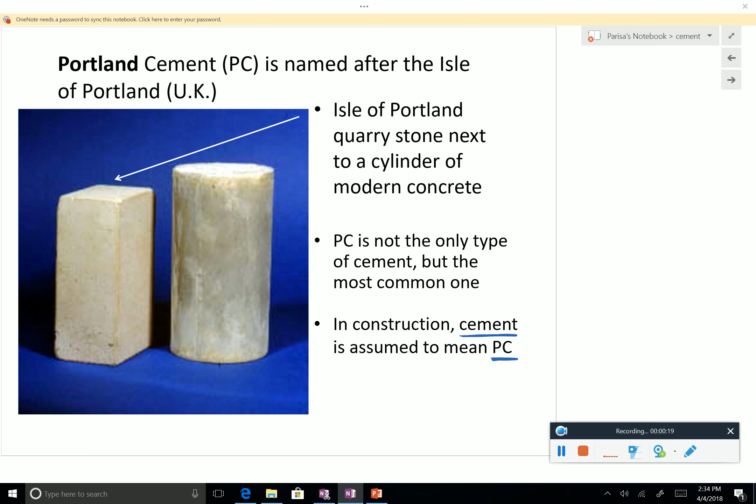When we talk about PC, it's not personal computer, it's actually Portland cement in the context of civil engineering or architectural engineering materials. And whenever you say just cement, people normally mean Portland cement. This is not the only type of cement available. It's worth knowing.

So, people typically use the terms cement, mortar, and concrete interchangeably. But as engineers, you need to be careful. These are different things. So cement paste is cement and water. And cement paste is, you can think about it as the glue, which glues the aggregates together to make concrete. So that's what it is. Cement by itself doesn't have any gluing effect. You need to mix it up with water.

What is mortar? Someone knows? Cement, water, and sand. Exactly.

It's important. I hope you remember that mortar is not the same as cement. So you hear people saying, "Oh, I cemented my driveway." No, you didn't cement your driveway. This is wrong to say.

So as your colleagues from Pittsburgh or around were saying, yes, I remember. Just kidding. It's okay. It's good to laugh in the afternoon. I like energy more than if you don't have any energy, like some days where whatever I do, there is no energy. Anyway, this is better.

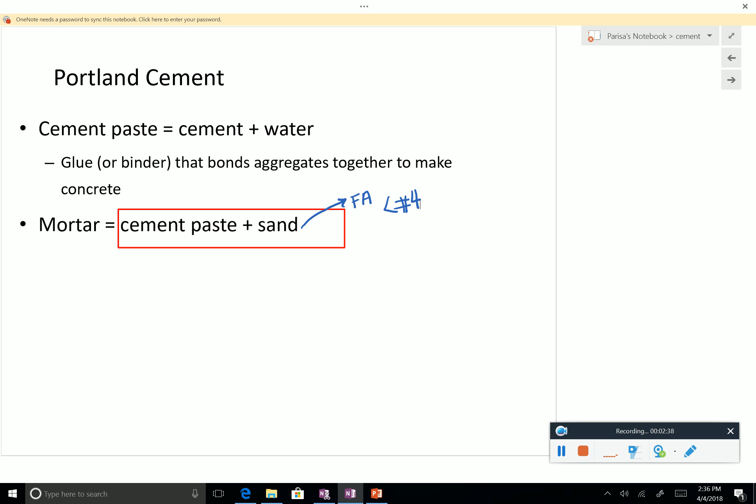Cement, water, and sand. And sand, when we talk about sand, we don't necessarily mean sand in the sense of soil mechanics. It's more like fine aggregates, whatever passes through sieve number 4. And concrete. So what is the difference between mortar and concrete then? Yes? Concrete has stone as well. Exactly. So we call them not stone, well, maybe here, but it's coarse aggregates.

So as you can see, the aggregates, fine aggregates and coarse aggregates, make up a major part of the volume of concrete. And cement is much less. And then you have some water, and of course you are going to end up with some air voids. And you see that you also sometimes have to add admixtures to get some exotic properties. Almost all modern concrete mixtures have some admixtures.

So this is pretty much what concrete is, and we are going to focus today and on Friday on cement before moving to the design of concrete mixes.

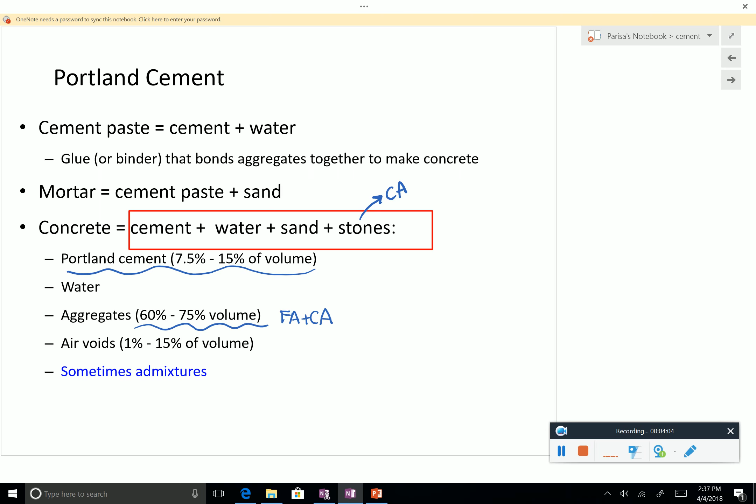So I want to show you a short video. This time I chose a very short video to show you how cement production is. Please pay attention to remember the main steps. It's very simple.

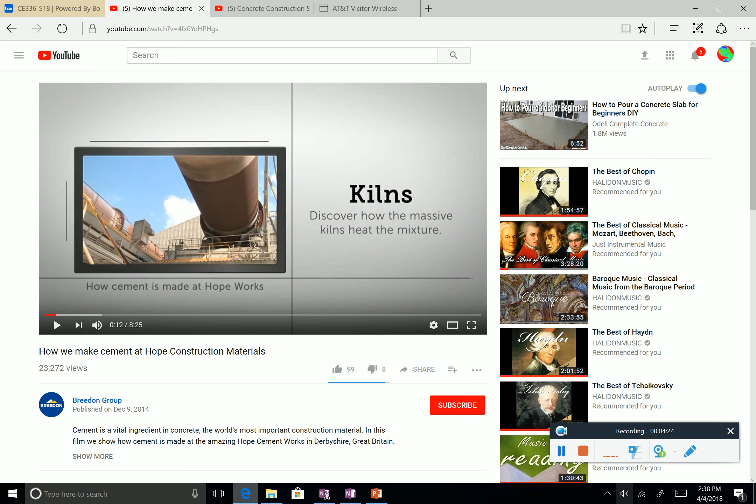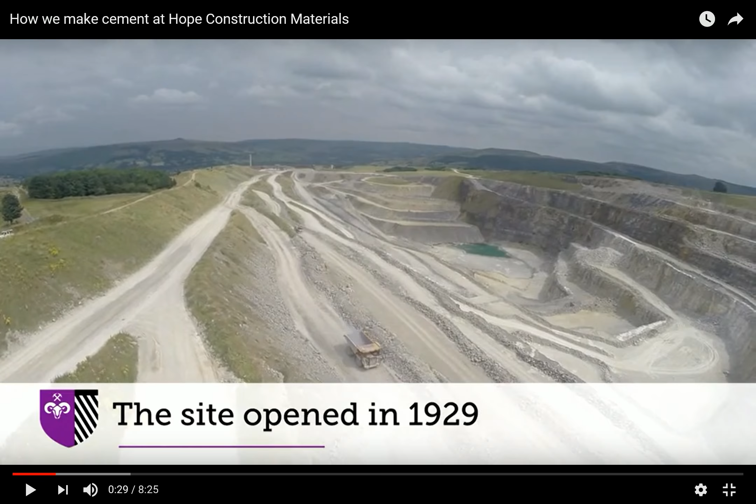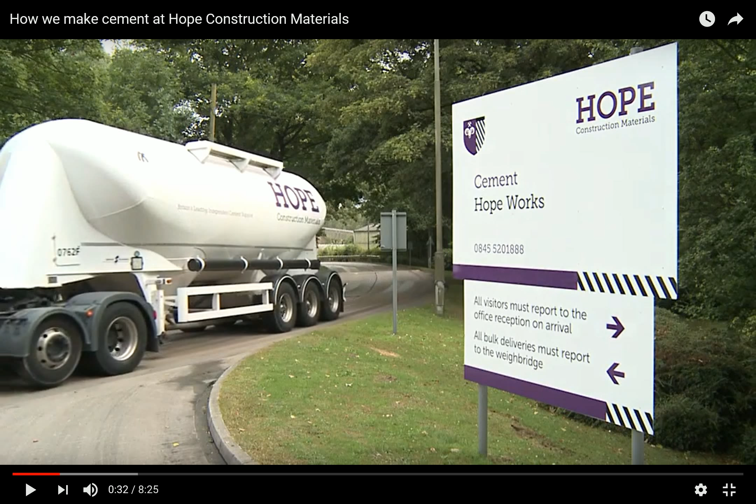It worked in the morning. Wow. Okay, wait. That was interesting. Why is it that way? So this was perfectly fine this morning. I may narrate it myself if it doesn't work. So let's see. Let's try again, change the cables. Okay. Okay, please keep quiet so everyone can listen.

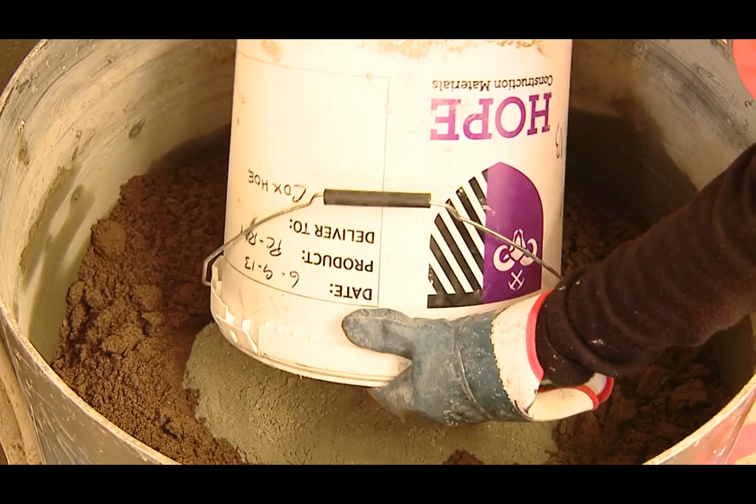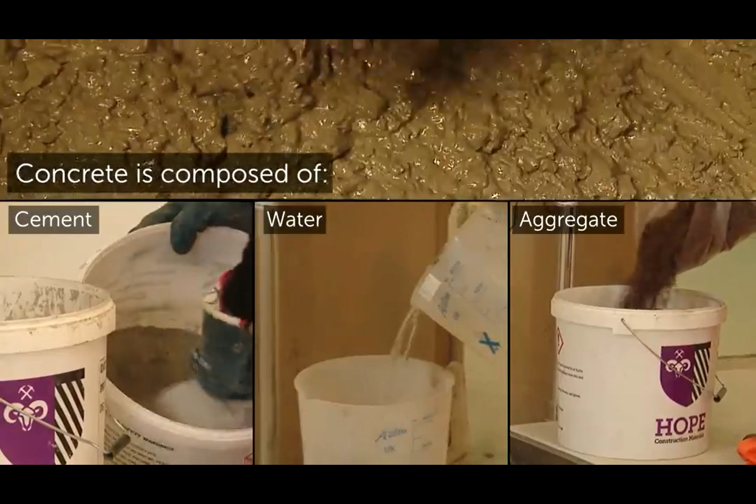Million tons of cement is produced here at Hope Works every year. The site employs around 180 people and has a strong safety record. It also prides itself on being a good neighbour and has long-standing links with the local communities in the surrounding Peak District National Park. Cement is a versatile construction material. It is the essential ingredient in concrete, the world's second most consumed material after water. Concrete is made up of cement, water and aggregates, rock, stone or gravel.

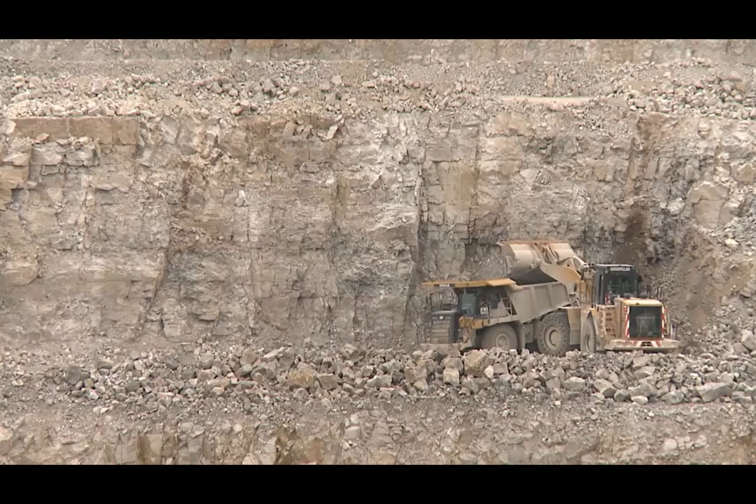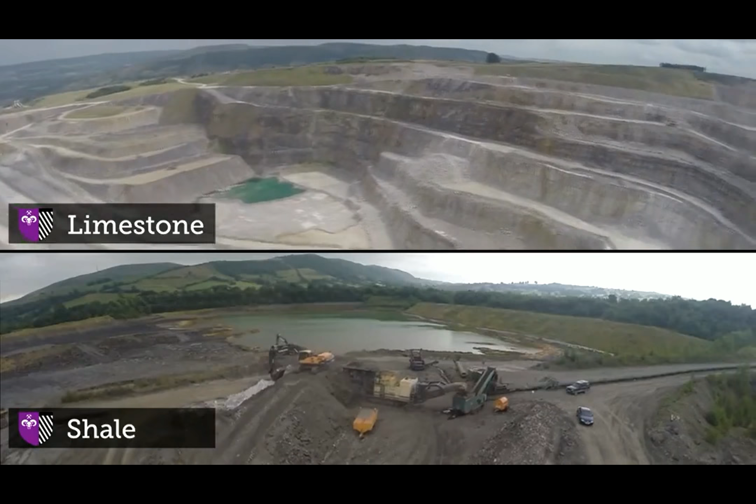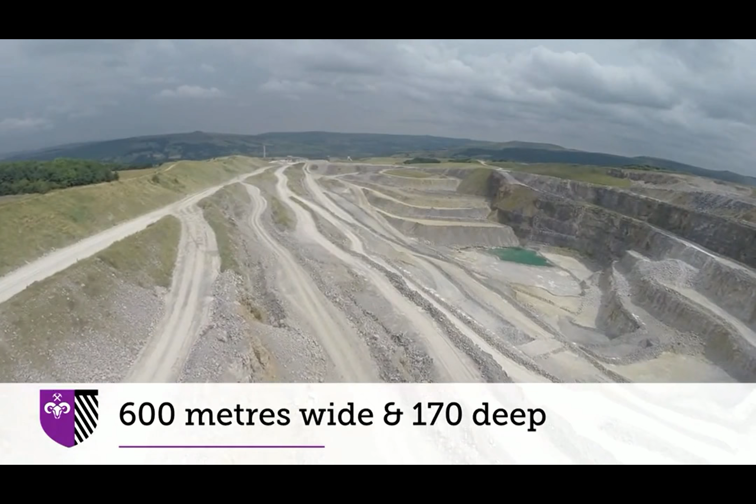Hope is renowned for its consistently high quality, including light coloration and strong performance. But how is it made? The process to manufacture cement is complex. It relies on ensuring all the right ingredients are combined at the right temperature. Just like baking a cake, the chemistry has to be just right. And the process starts here in our two quarries. Limestone and shale are the key ingredients for the cement mixture. This is the limestone quarry, which is 1.5 kilometres long, 600 metres wide, and 170 metres deep. At any one time, there are around 30 working faces, measuring approximately 4.5 miles in total length.

This rock here was formed 330 million years ago. Now 2 million tonnes of stone is extracted here every year. Shale is the other key ingredient, removed from our other quarry by heavy machinery, through a mobile crusher, and into the stone store. We also use pulverised fly ash, or PFA, as a part replacement for shale. The chemical composition of PFA, a byproduct from coal-fired power stations, is very similar to shale. As the quarry progresses, the worked-out areas are gradually restored, giving them back to the natural landscape as part of the conditions of Hope's planning permission.

Over 13,000 trees have been planted since 2003, and the company works with nature organisations to ensure the restored land encourages a wide range of wildlife for the future. Falcons, rabbits, stoats, ravens and hare are among the animals found in the quarry. To access the rock, controlled explosions take place around 100 times each year.

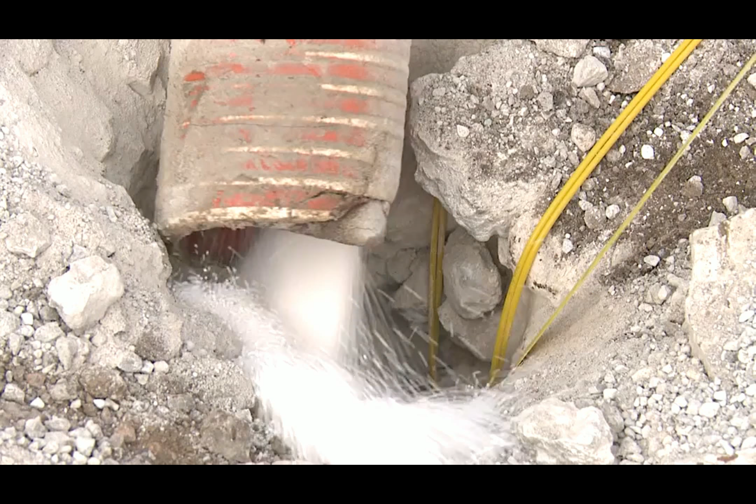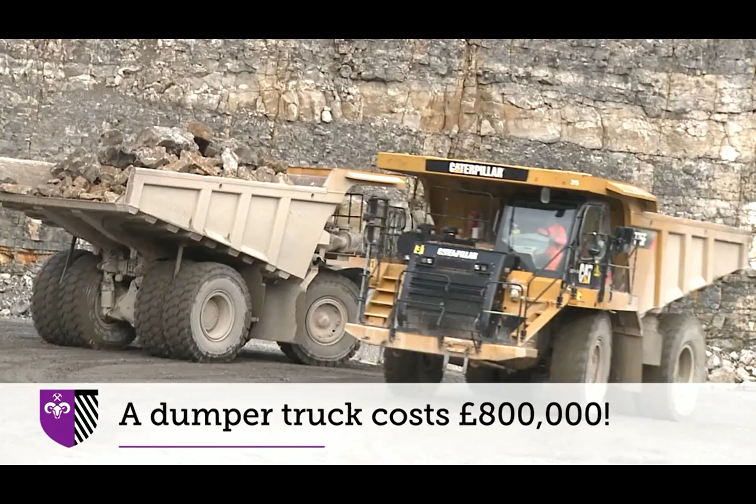Each of these blasts produces around 20,000 tonnes of material for Hope to use in the process. Skilled operators move the stone from the blasted areas so that the rock can be crushed. Some of these giant dumpers and diggers cost around £800,000 to buy. A new tyre can cost up to £16,000.

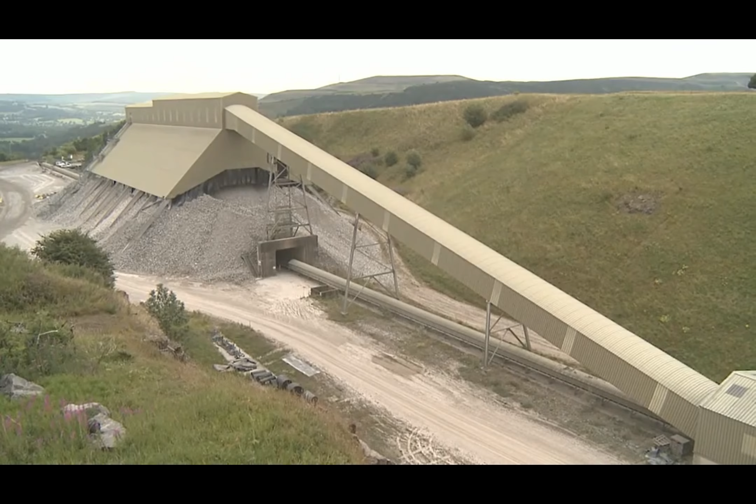The rock is crushed 3 times, from 1 metre down to stones smaller than 20 millimetres in diameter. The primary crusher can get through 1,400 tonnes of rock every hour. The second and third crushers process around 1,000 tonnes per hour. The stone is transported via conveyors to the works, where it's held in the stone store.

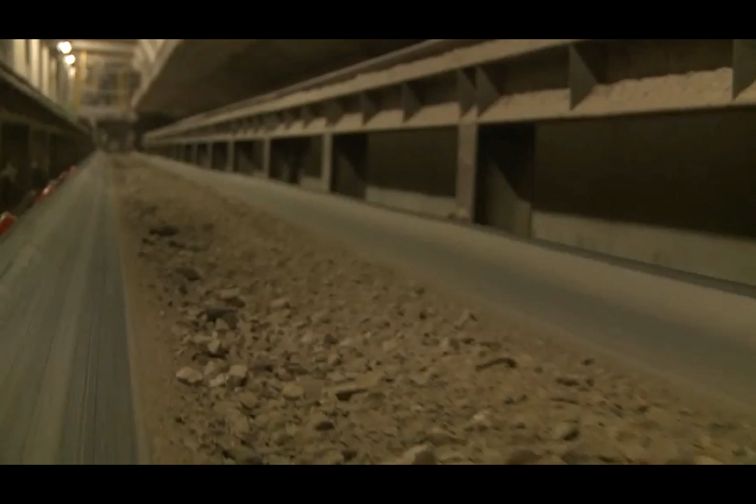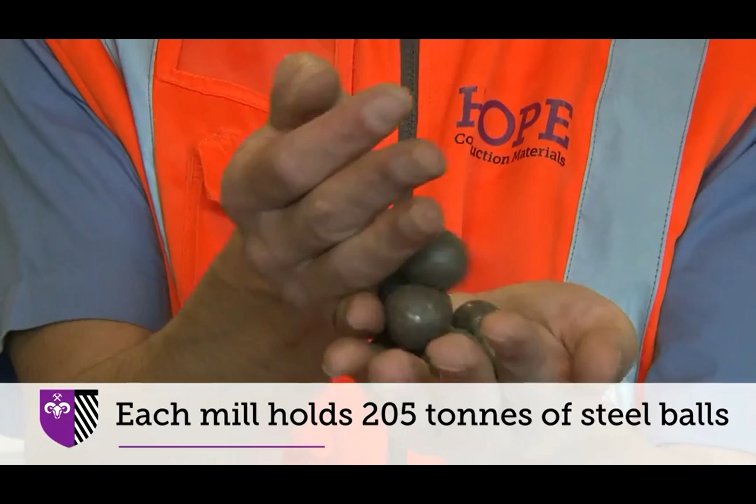Now we move to the works itself, where the quarried stone from the limestone and shale quarries and other materials are put through a chemical process to produce the ultimate product, cement. The stone from the quarries is transported to mills to be ground into a fine powder. In a tunnel beneath the stone store, limestone and shale are mixed together and moved on conveyors to the mills. Each of these mills holds 205 tonnes of steel balls, which grind the rocks to the required powder size.

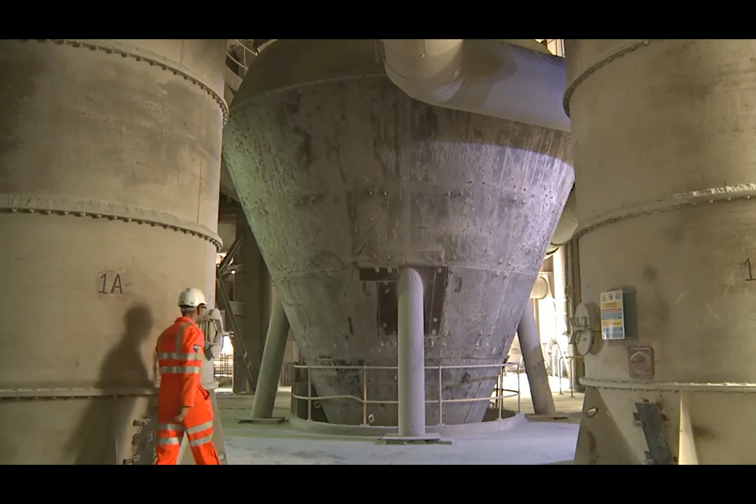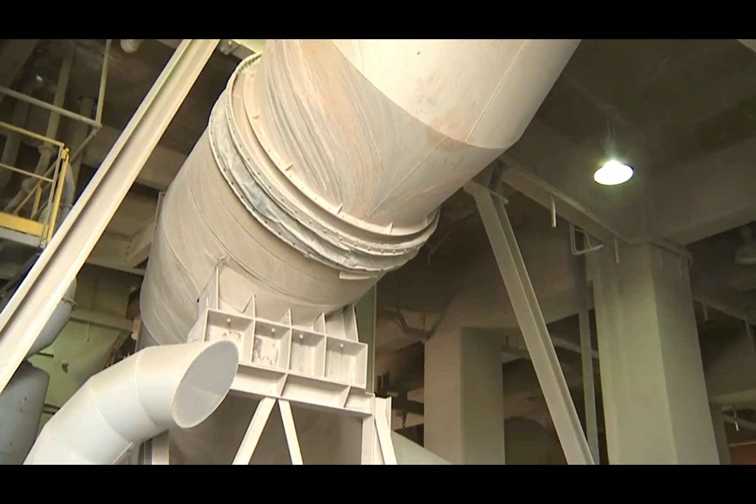The raw material powder, or raw meal, is then transferred to a blending silo before being blown to the 6th floor of the building, the preheater tower. You can see the cyclone tube structures inside the tower. As the raw meal moves from the top cyclone to the bottom, it heats up from 80 to 830 degrees in just a few seconds, preparing it before it goes into the next and most important stage of the process, the cement kilns. The kilns are the heart of the manufacturing process.

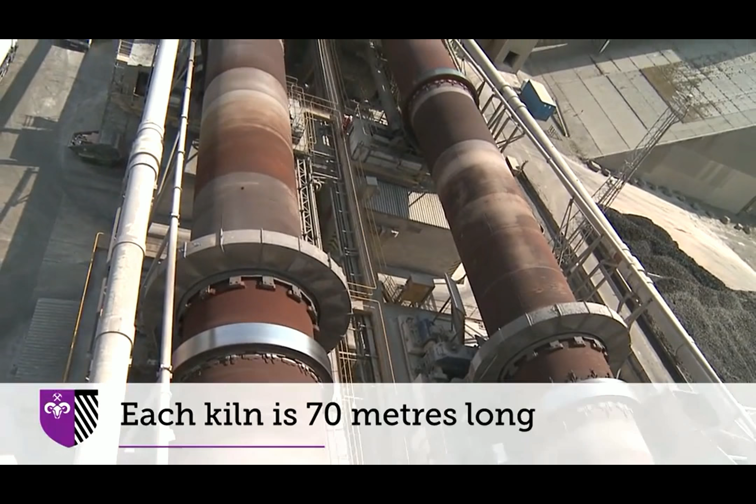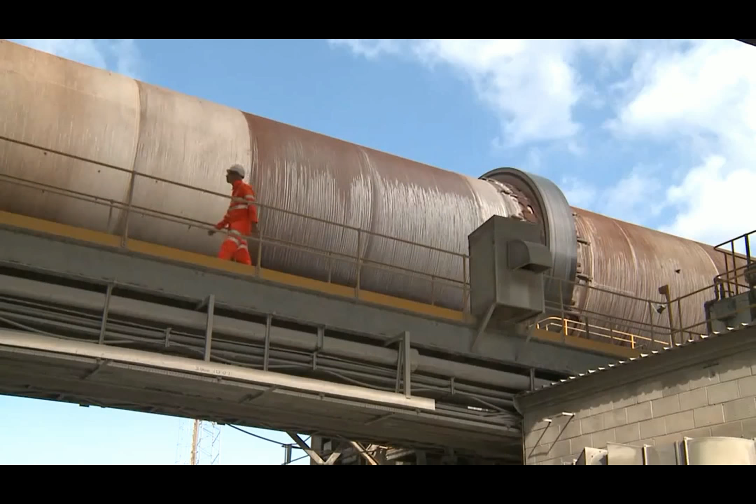There are 2 at the Hope Works, each is 70 metres long and 4.8 metres in diameter. These giant steel tubes are lined with special heat resistant bricks, over 70,000 per kiln. Each kiln is turned 2 revolutions per minute, resting on giant rollers and powered by an electric motor. The kiln operation makes up a large proportion of the works' monthly £1 million electricity bill.

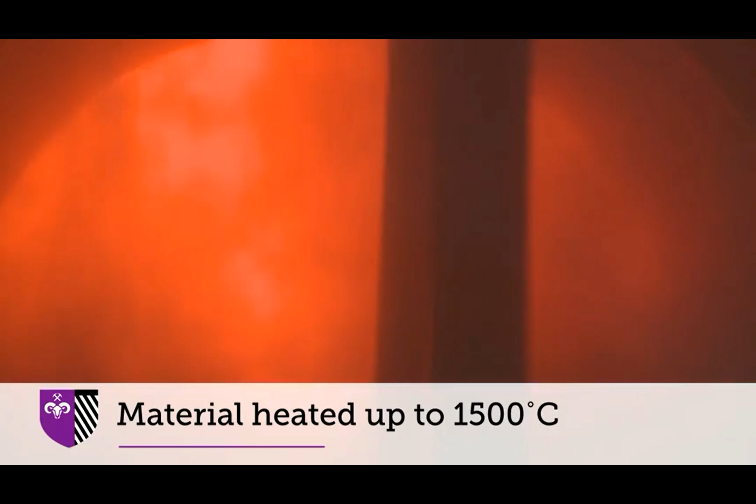As the cooked materials travel from the preheater cyclones into the kiln, it's heated up even further to more than 1,500 degrees Celsius. At this temperature, the limestone, shale and fly ash combine chemically to form a new type of mineral substance, cement clinker, the properties of which are key to the cement product's ultimate performance in construction.

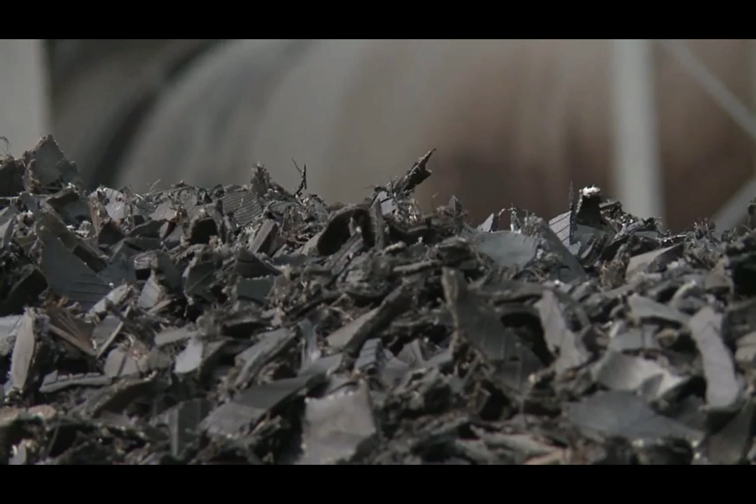In order to reach these temperatures, the process needs a large amount of high-energy fuel. In the past, this was just coal, but now Hope uses a wide range of fuels, making positive use of processed waste materials such as scrap tyres and domestic waste. Around 35% of the plant's fuel now comes from more sustainable waste sources, helping reduce its environmental impact and keep the bills down.

The 132-metre-high chimney provides a local landmark, but it also plays a vital role in ensuring Hope Works is as environmentally friendly as possible. Emissions from the kiln process are controlled and monitored through high-tech equipment connected to the chimney. The company operates to very strict limits on emissions, which are governed as part of the site's overall environmental performance by the regulator, the Environment Agency.

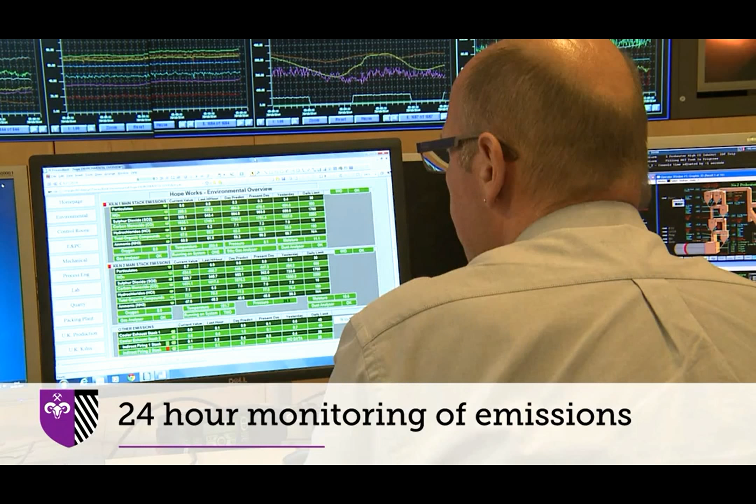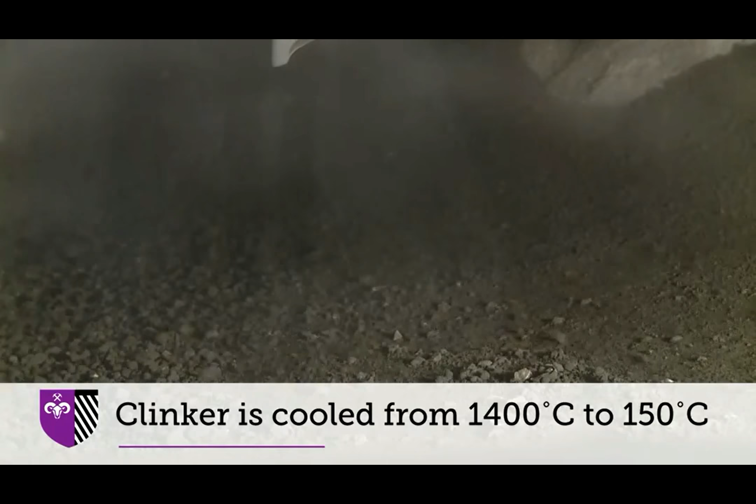Back to the cement. The nodules of material which are formed are called clinker. These are cooled very quickly from 1,400 degrees Celsius to less than 150 degrees, and then moved to the clinker store. Once cooled, it's stored and then ground in cement mills with important additives for the final cement product, such as gypsum, which controls the setting process. From the cement mills, the more familiar cement powder, the final product, is transported on to our customers.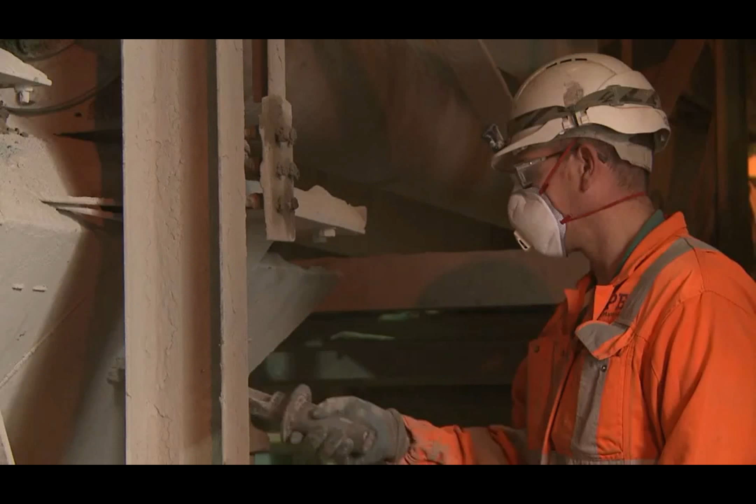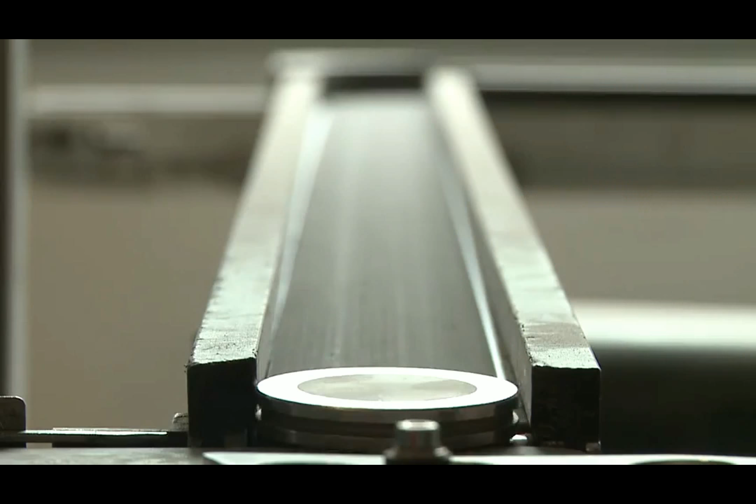As part of the overall process control and commitment to producing a high-quality product, sampling and testing takes place at each stage of the process and on the finished product. Cement is transported from Hope Works in two ways. Around 1 million tonnes leaves the site each year via the rail network to Hope's depots, where it's transferred onto lorries for onward delivery to customers. Completion of a major rail investment program in 2008.

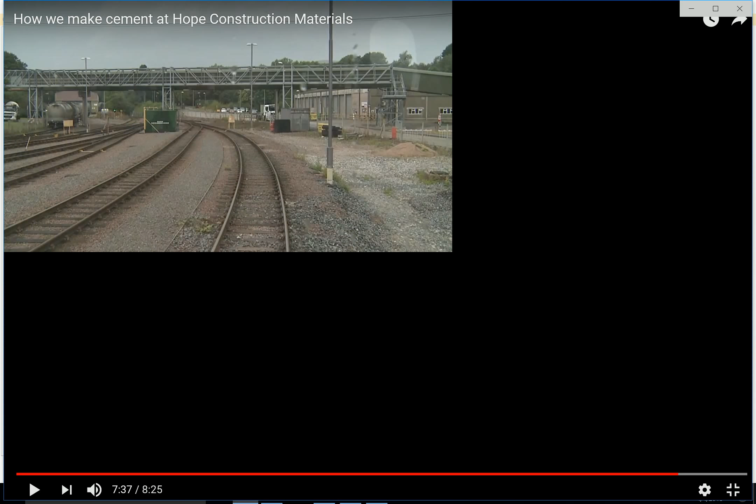Okay. So try to write down what the main steps are in production of cement. I think it's in your next slide. So what are the raw materials you have? Before we write, let's just review that together. So what else? Fly ash, right. And then what happens to them? You crush them. Do you remember the size? Almost less than 1 inch. 20 millimeters, less than an inch. And then what happens then?

Exactly. And then afterwards, where are they heated? Do you remember the name of the kiln? Exactly. And the temperatures can be very, very high. You heard what numbers? 1500 degrees C, which is really, really high. And what is the output of the kiln? Clinker, right? Those kind of balls that we saw. And then what happens to them? We grind them to get cement.

So these are kind of the main processes to get cement. So these are part of the lectures. That means that you may have questions, etc. There is another one that we don't look at in the class. It's just 5 minutes. I made sure that these videos are short this time. So when you review the material, just take a look at that also. It's kind of a different presentation, but pretty much the same kind of material.

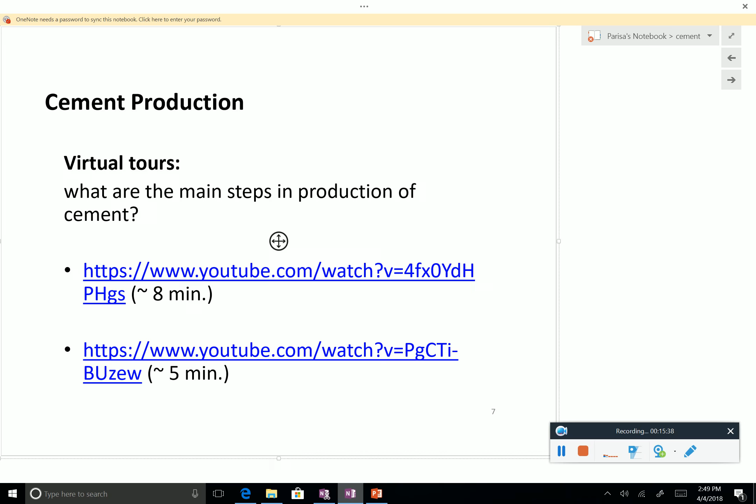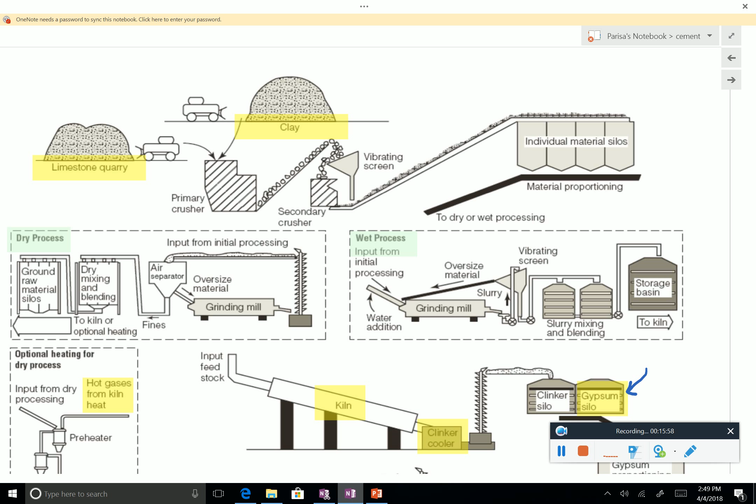How many of you have seen cement when taking it out? So it's a powder, right? It's a powder, grayish, very, very fine. So if you want to look at the main steps in a diagram, this is from your textbook, so you can look at the details there. You see that you mix, let's say, clay or shale, both work, limestone, you crush it, and then you saw how they are being carried over, and then you basically feed them into the kiln, and then you get clinker, which will be cooled very, very fast, and then you add gypsum.

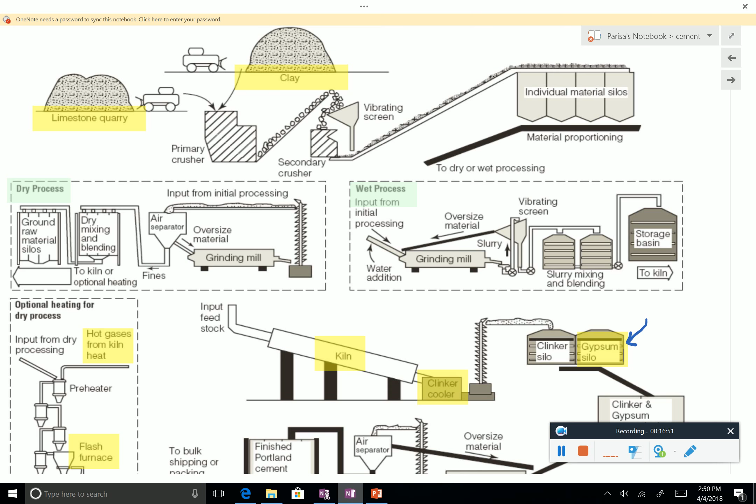Anyone remember what gypsum is doing? What is its function? Exactly. So we haven't talked about what exactly setting is, but that's the concrete gaining the strength, because it has a lot to do with cement properties. So gypsum is added, and then you get cement. In the old times, people were using a wet process where they would use water to mix things up better, but now this process is being abandoned because it's very energy intensive. So you don't want to do that. And what I showed you, the dry process, the modern process, is more common.

So the reason that you have limestone and shale or clay is because you need to have two main ingredients for cement. One, you need to have calcium oxide, and you need to have silica and alumina, the oxides of silicon and aluminum. And they can have different sources. So you saw limestone and shale, it could be clay, and we looked at the quarries.

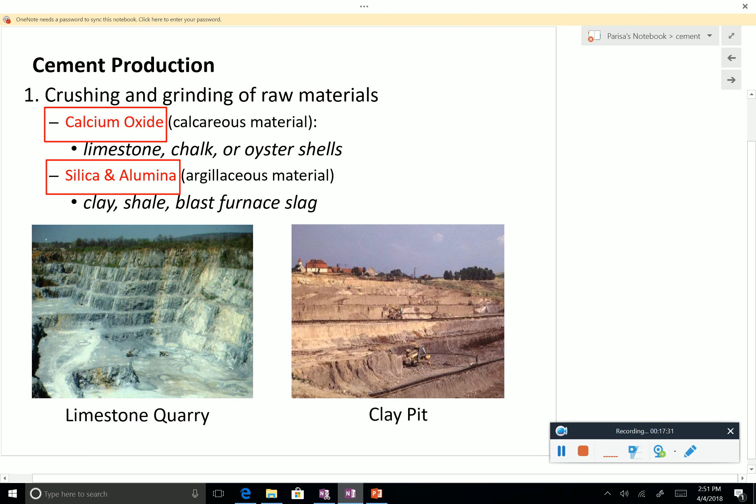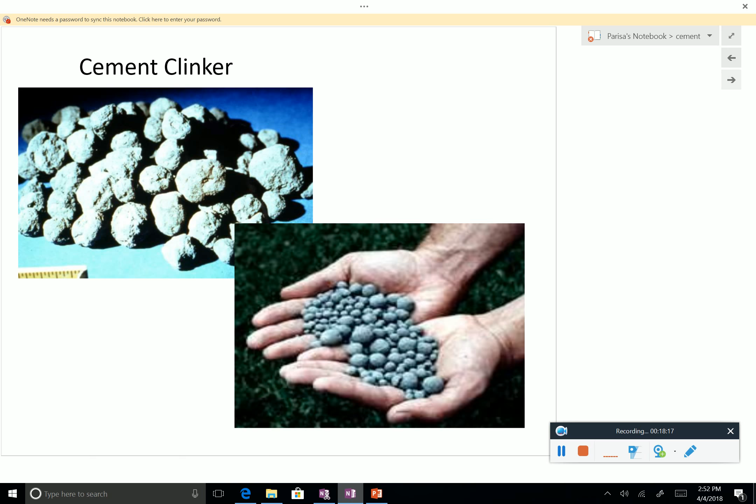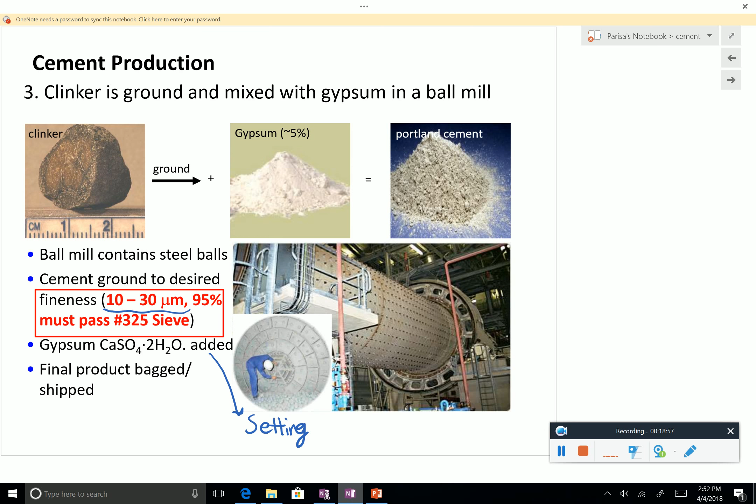So this is how the clinkers look like, and then you basically grind them. Do you remember what was inside these mills? Steel balls, right? They crush them, and look here, you are going to have very, very fine powder, which passes sieve number 325. And then you add gypsum to control the setting. And then you grind. So the fineness of cement is an important property of the cement. And it is measured in terms of surface area per unit weight. So the more surface area per unit weight you have, your material is finer or coarser.

If a material is finer, let's say you have 1 kilogram or one pound of two materials, if you have more surface area per weight, is the material finer, smaller, or coarser, larger? Finer, right? If you have 1 pound of rice versus 1 pound of plums, the surface area of rice would be much larger than the surface area of plums. So typically you see that it's being expressed in meters squared per kilogram.

And why do we care about it? Because remember, you need to mix cement with water. So if you have more surface area, you have more surface interface between water and cement, so it reacts faster. It's a very, very important property. And if it reacts faster, it means that your concrete sets faster. So if you are making your driveway, it gains the strength faster. You can walk on it sooner. Right? We'll talk about setting a little bit more, but just to give you an idea. And how do we achieve more fineness? You just grind it for a longer time.

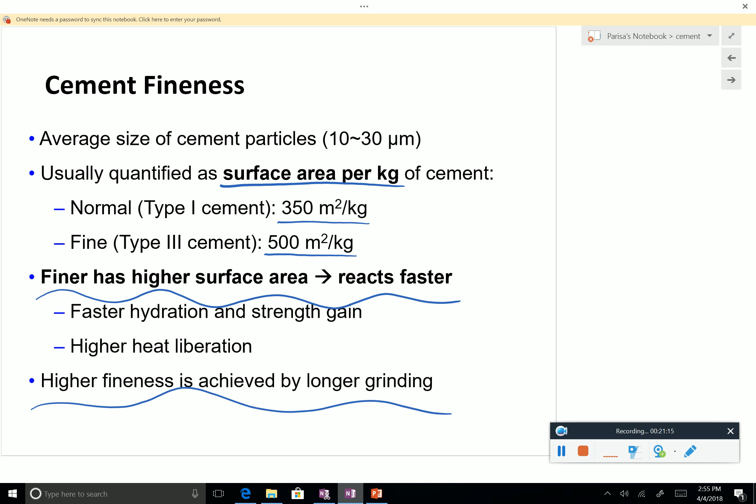And this is important. You saw one example of a cement plant. I hope that you saw that it's a major operation. It's a big plant. It works continuously. You have several shifts who work. It's very expensive. There are only about 170 in the US, and they produce a large amount of material.

And it's about, let's say, 5 cents a pound. This looks cheap to you, but because you need a large amount of this material, at the end, cement is the most expensive component of concrete.

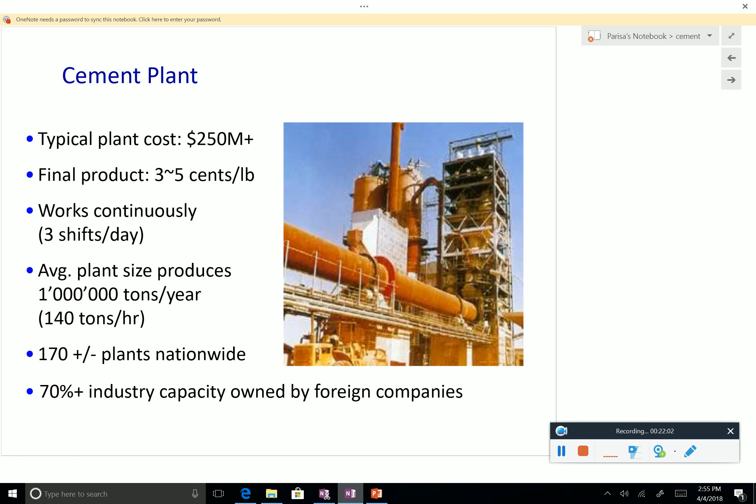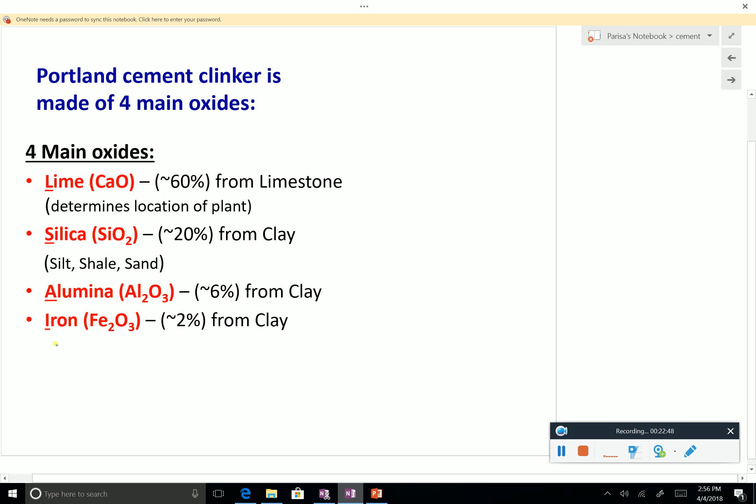What is important for us is to understand a little bit the chemical composition of cement. At different temperatures, you are going to have different compounds formed, and we want to see what these are. It turns out that cement has 4 main compounds. One is lime, which is calcium oxide, and that's why you need limestone. Then there is silica. Then there is aluminum oxide, alumina, and you also have a little bit of iron oxide.

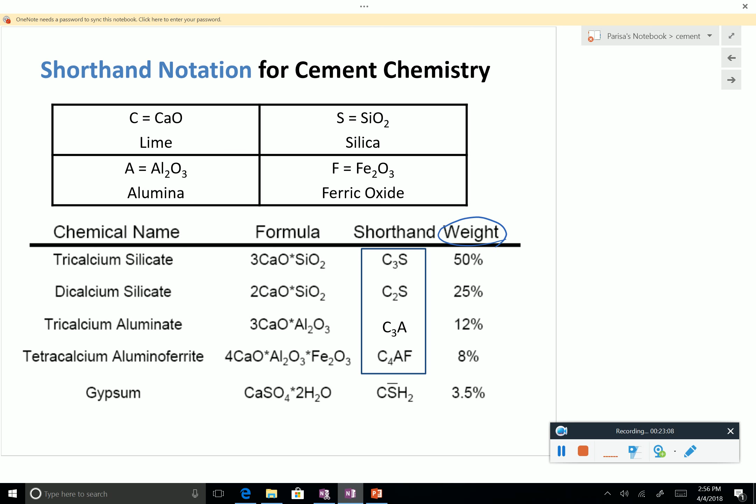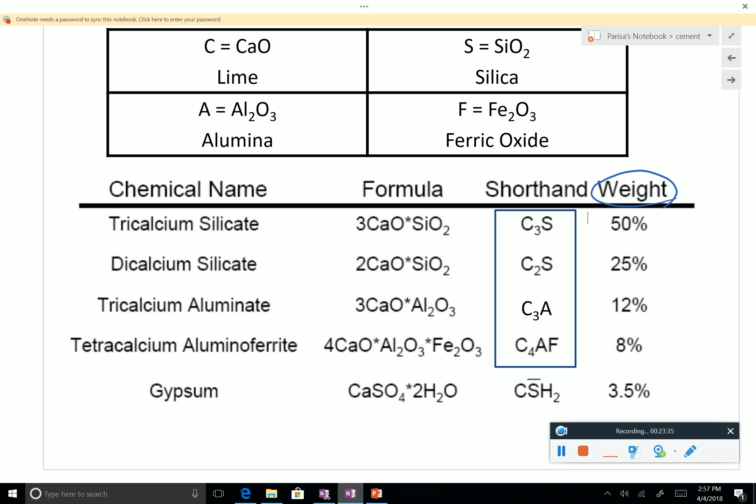Now, inside cement, you don't have them as simple as you see up there. You have a combination of them. For example, you have tricalcium silicate. But engineers have come up with shorthands. So what you saw forming in the kiln are these: C3S, C2S, C3A, C4AF. And depending on your cement, you are going to have different weight fractions of each of these compounds. How much you have of each is super important in defining the properties of the cement.

So, why is it important? These 4 react with water, and this reaction with water is called cement hydration. This is the main mechanism behind concrete gaining strength. If you have ever worked with concrete, you know that when you just mix it, it cannot sustain weight. If you step onto fresh concrete, you sink in. You need to wait for it to gain strength, and what causes strength is cement hydration. And these reactions are exothermic, which means they generate heat.

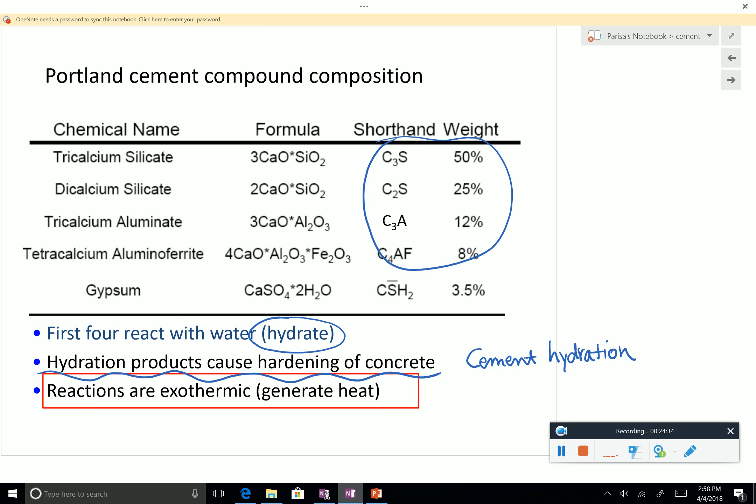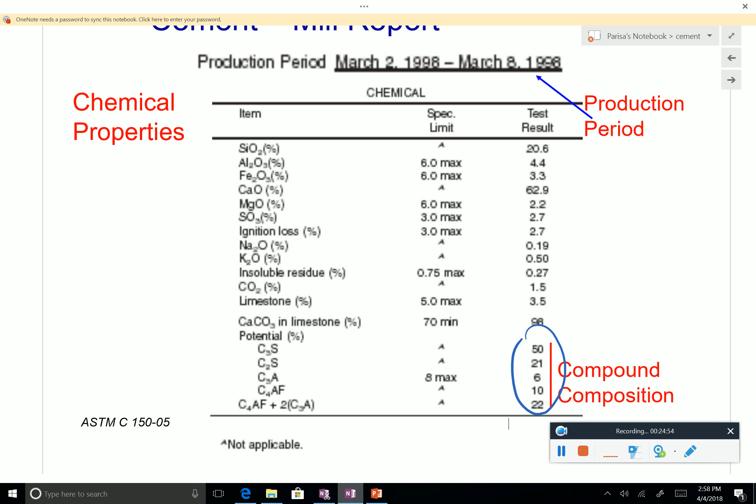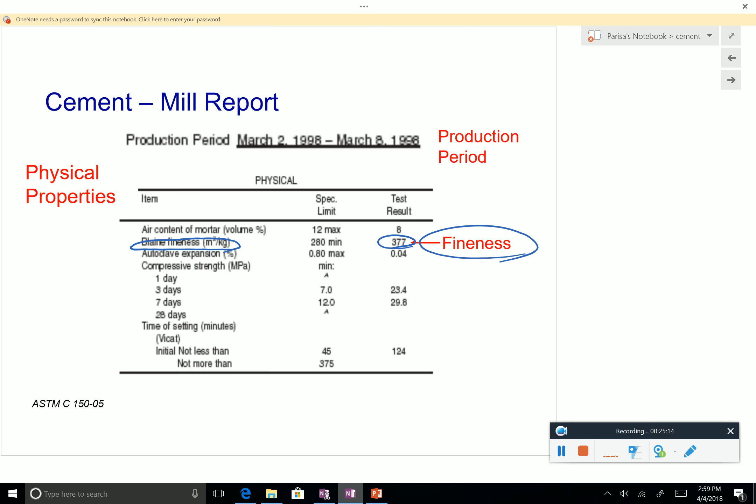A cement plant mill report looks something like this. They tell you the weight fraction of each compound in the production. You have the date and other information. Another super important piece of information is fineness, which we defined before. The unit is meter squared per kilogram, surface area per unit weight. Why do we care about that? Because that defines everything about the type of cement you have.

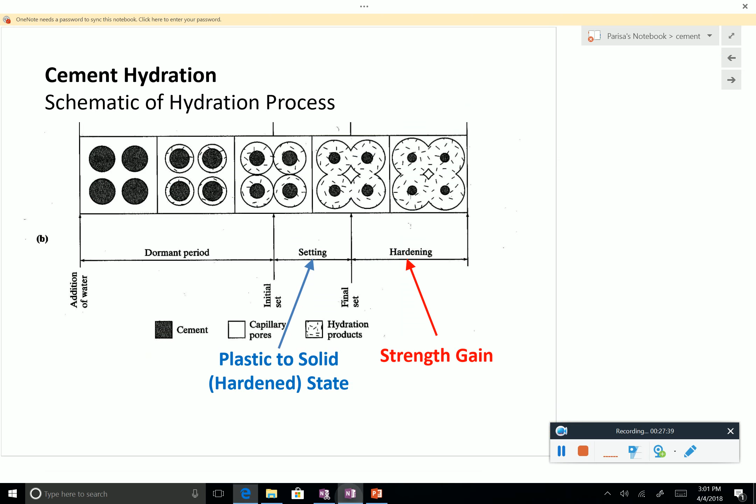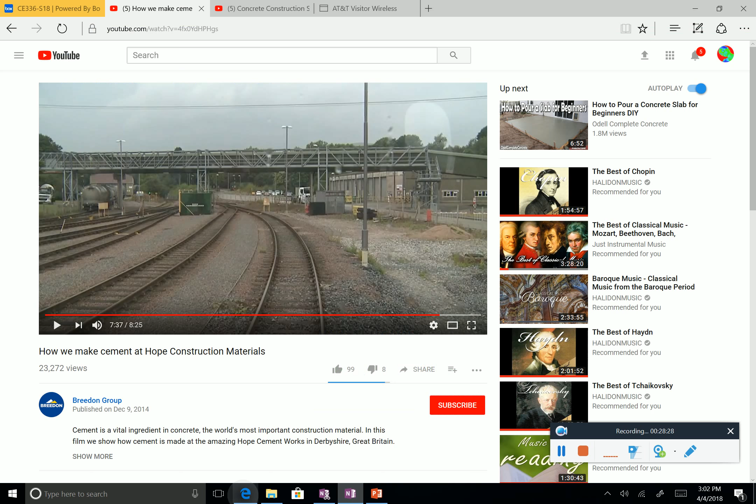So now we want to talk about hydration of cement, which is super important because it's behind this strength development. Cement by itself doesn't do anything. You need to mix it with water. And I have another short video to show you, which I think is much better than me explaining this.

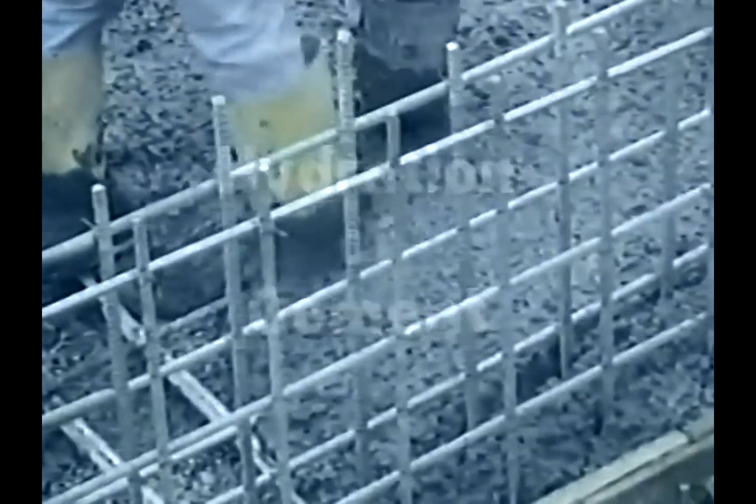Hopefully this is. And again, these videos are a part of the lecture, so every information there is added, it's a part of the lecture.

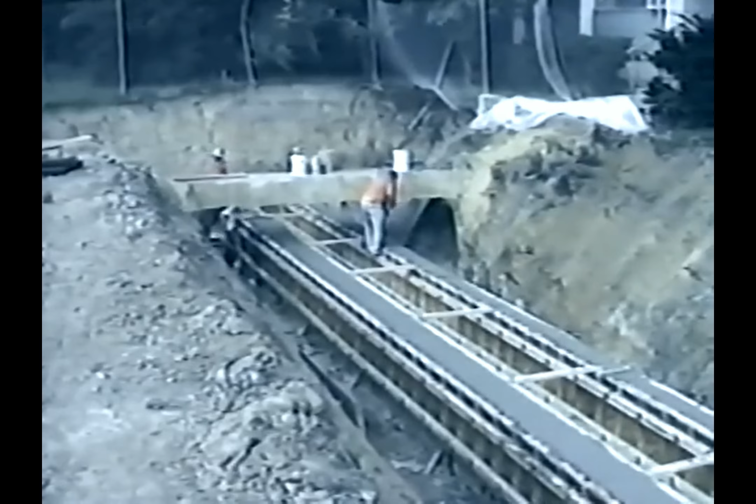Concrete begins its life as a fluid mixture of cement, water, sand, and gravel. Concrete can be cast into molds or forms and will harden to create the necessary components of a concrete structure. The setting and hardening of concrete is caused by a chemical reaction between Portland cement and water. This can be demonstrated by adding a small amount of cement to water containing an indicator. The rapid development of blue color reflects the release of hydroxyl ions from the dissolving cement.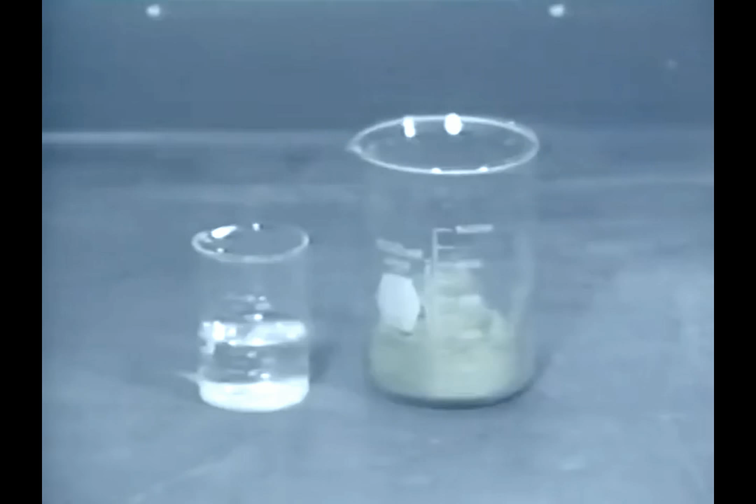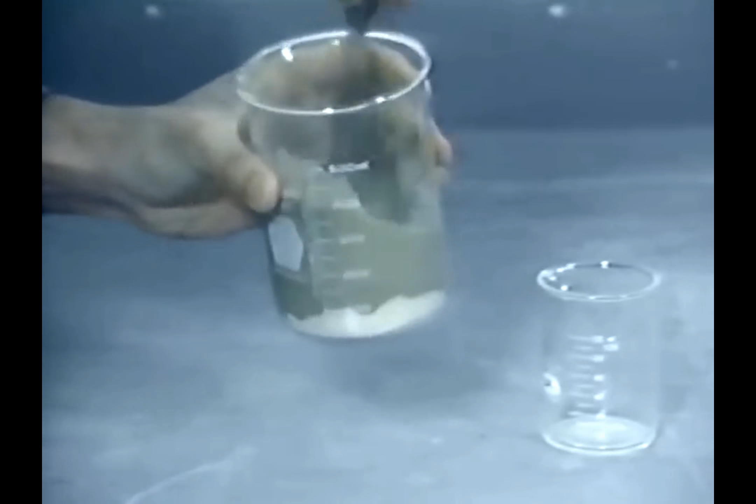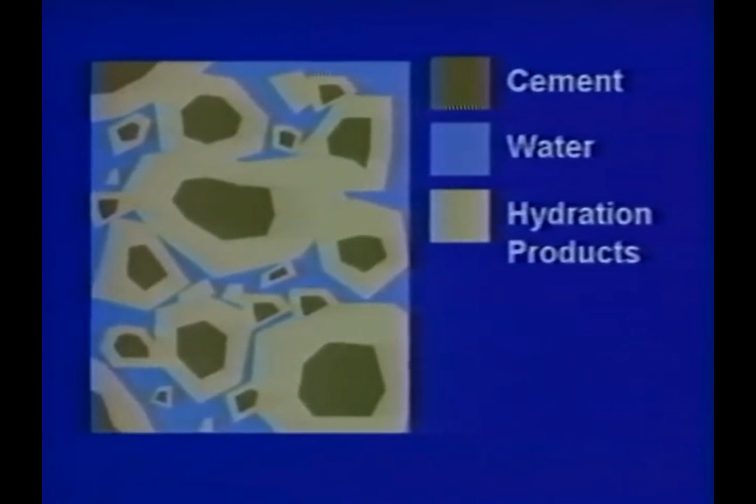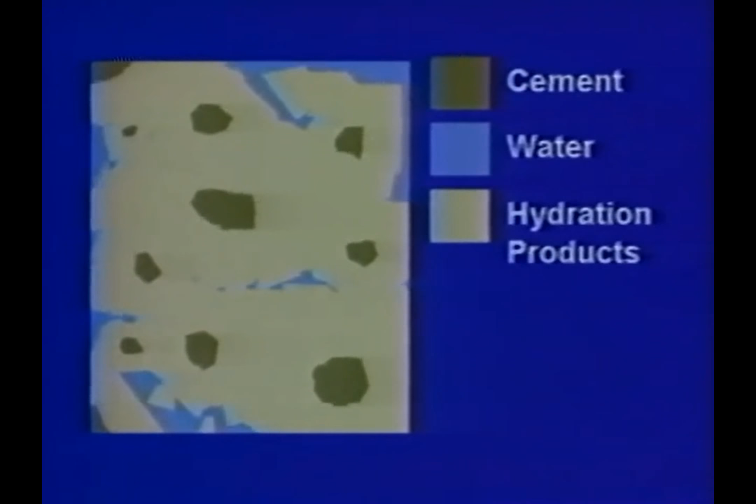The chemical reaction between cement and water is called hydration. The dissolving cement increases the levels of calcium and silica in the solution. When the concentrations of dissolved species reach critical levels, new solid products are formed through a precipitation reaction. This is a sketch of cement grains suspended in water. The solid hydration products form coatings around... The amount of strength attained by the mixture of cement and water depends on how effectively the space between the grains is filled up. Concrete will harden within a few hours, but hydration continues for weeks, even years after placement.

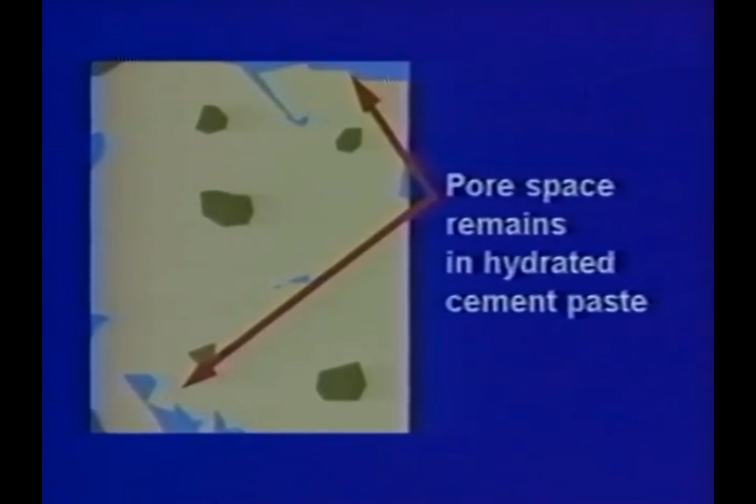Before the hydration simulation, particles of cement are arranged on a computer display. The computer determines regions of the particles that can dissolve into water. The bits of dissolved cement diffuse through the water in a random manner and react to form solid phases according to certain rules. After a cycle of dissolution, diffusion, and precipitation is complete, the computer proceeds with another cycle. As this process repeats again and again, the microstructure develops, building bridges between particles that provide strength to the material. Computer simulation has proved valuable because it allows researchers to test conditions and make measurements that are difficult to achieve in real life. At the end of the hydration simulation, the structure of the hardened cement paste is very similar to that observed under the microscope.

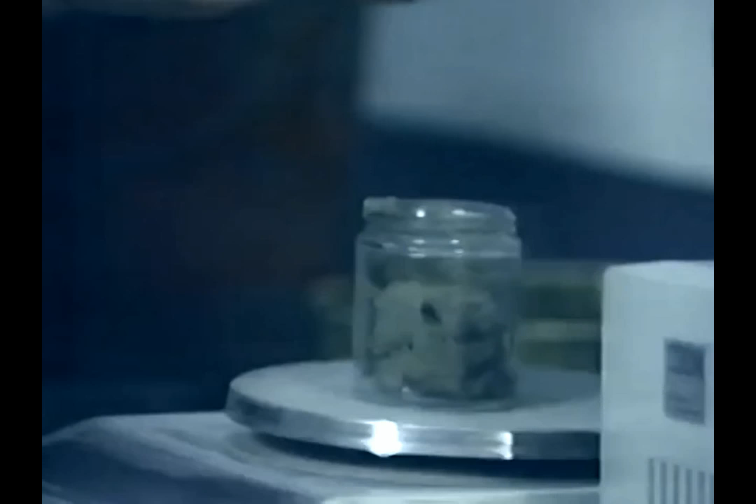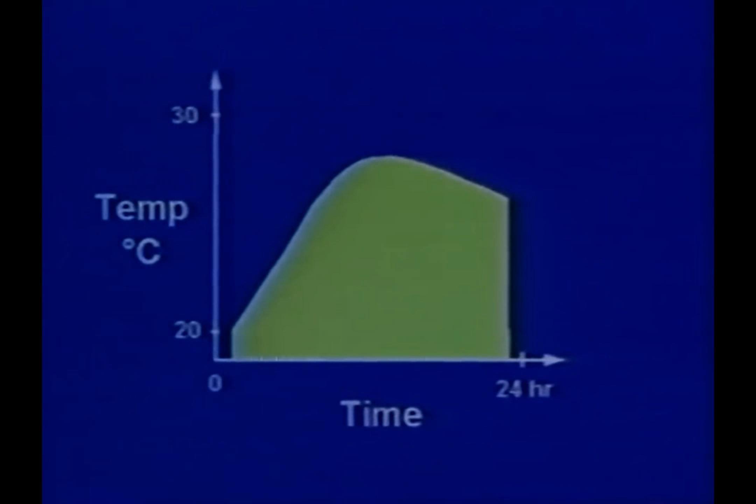Hydration is an exothermic process which generates heat through chemical reactions. The process of hydration can be easily followed by monitoring the production of heat that accompanies the reactions. This is done by sieving mortar from a batch of concrete and weighing it into a bottle which is placed into an insulated container. A thermistor is then embedded into the fresh mortar. The output of the thermistor can be recorded by a computer. The results of this experiment can be plotted as a curve of temperature versus time. The area under the major peak can be related to early strength development. The initial dissolution of cement produces a short release of heat.

After the initial dissolution, hydration products are quickly precipitated on the surface of each cement particle. The layer acts as a protective barrier and temporarily delays the further dissolution of the particle. This slows down the reaction for a period of several hours and is called the dormant period.

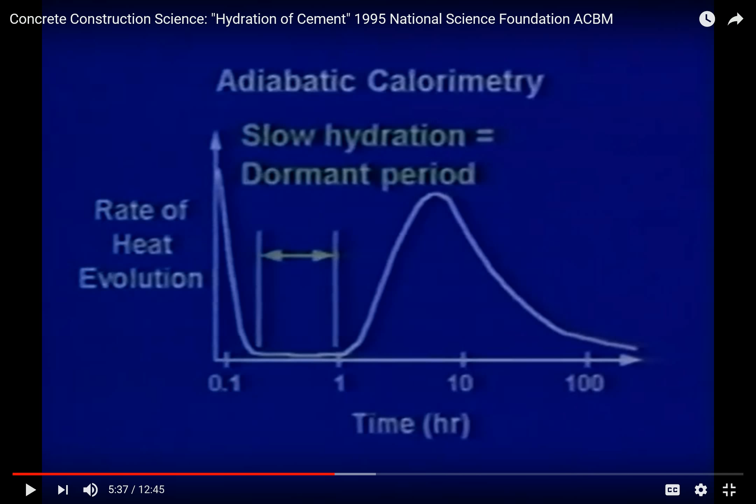So in the beginning, when you have this hydrated layer, after a while, since you have a protection around the cement particles, the reaction slows down. And this time is the time when you would transport the material from the plant to the job site without the material setting in your truck. So if you didn't have that, then you would get to the job site and you couldn't empty the truck because it was already hardened. So it's super important to know this shape and these characteristics of how each cement hydrates, and we know that from the rate of heat release.

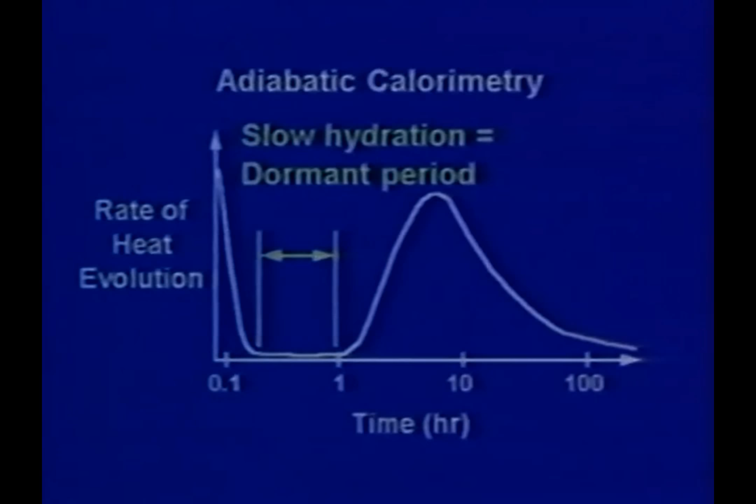The existence of the dormant period allows concrete to be transported to the construction site and placed and finished in the molds. The end of the dormant period represents the beginning of setting, at which time the cement again starts to react more rapidly with water as new hydration products are formed.

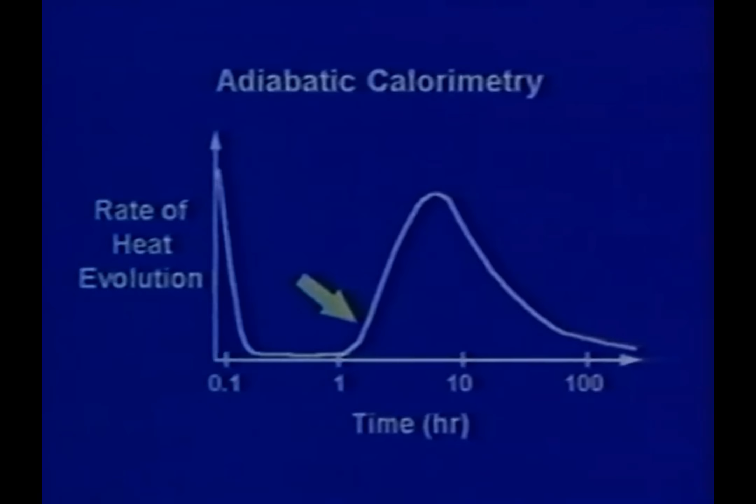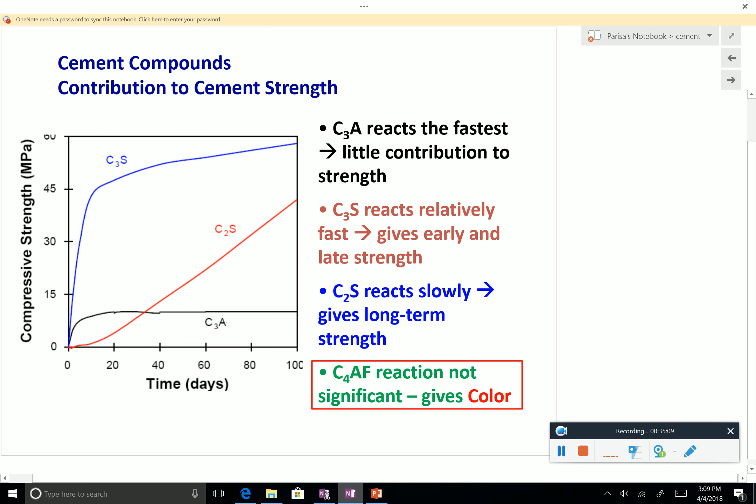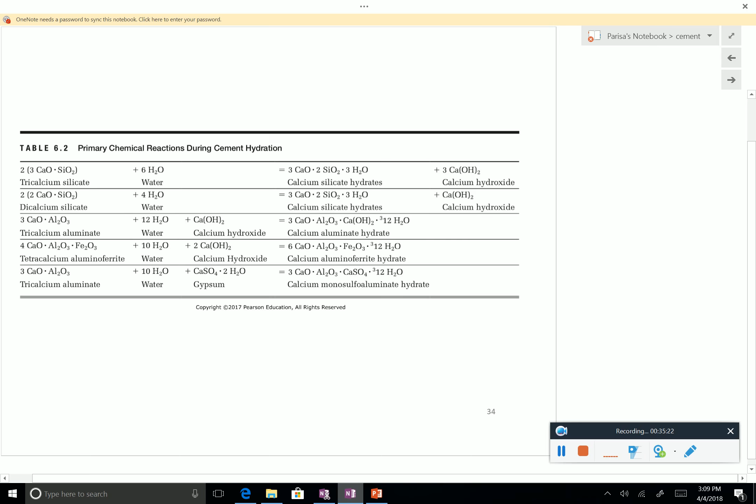So first of all, this has more details afterwards, and there are two other videos. They're all short, on hydration, that you need to look at home. You won't be able to look at it here. So you see here, the one I showed you is the last one, and the others altogether are just 15 minutes.

Okay. This is close, not close.